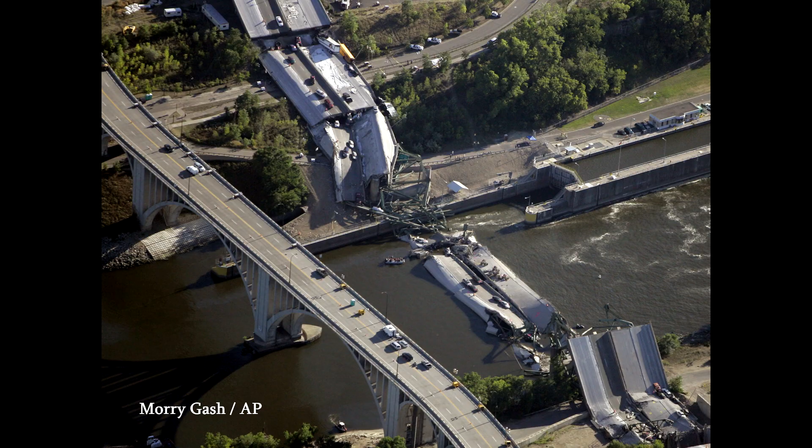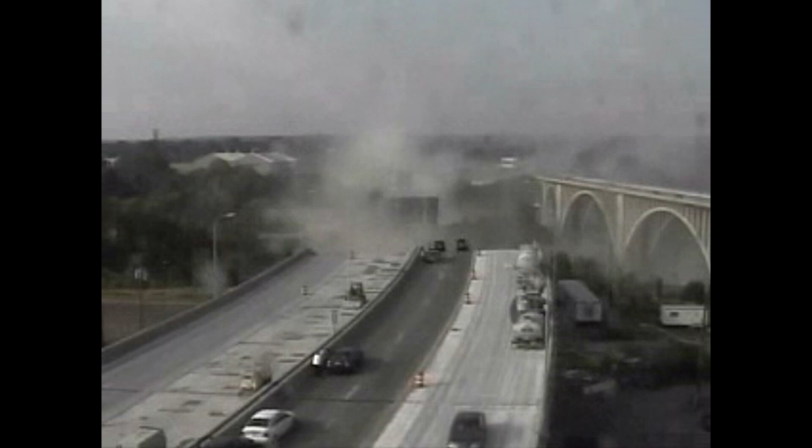As such, Minneapolis, Hennepin County, MnDOT, the state of Minnesota, and many neighboring communities boasted an excellent response to this sudden emergency, certainly saving lives in the process. But regardless of how quick and effective response was, one huge question remains. How on earth did the bridge collapse?

First, we have to start with what was going on when the failure took place. The collapse occurred at 6:05 p.m. during the evening rush hour, not to mention that this occurred in the downtown of the busiest city in Minnesota. About 140,000 vehicles crossed this bridge daily, and at this point in the day was when a significant portion of those crossed.

Additionally, roughly 578,000 pounds of construction equipment and material laid on the bridge for road work, adding stress to the bridge. However, these things added together shouldn't have been enough to bring the bridge down by themselves. That said, we're going to have to dig a bit deeper for the primary cause.

In previous years, the bridge had been cited for failure to meet various safety standards as well as for corroding rebar within the bridge in a separate citation. As a result, upgrades were made to the medians and railings, and about 2 inches of concrete was poured over the corroding rebar. These two things added over 4 million pounds of dead load to the bridge, a 19.5% increase.

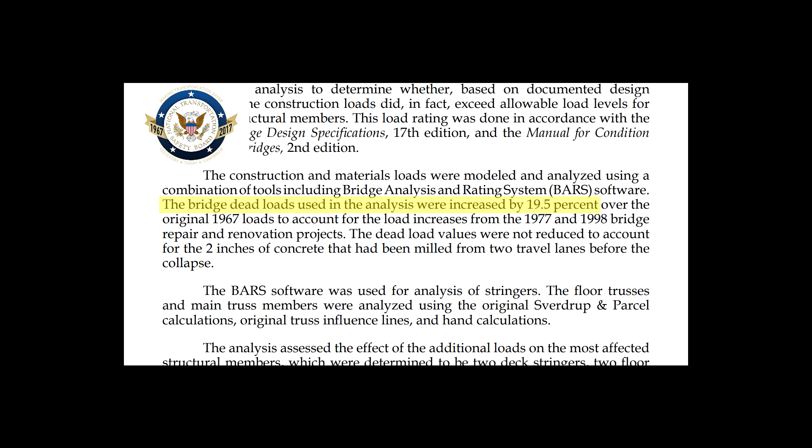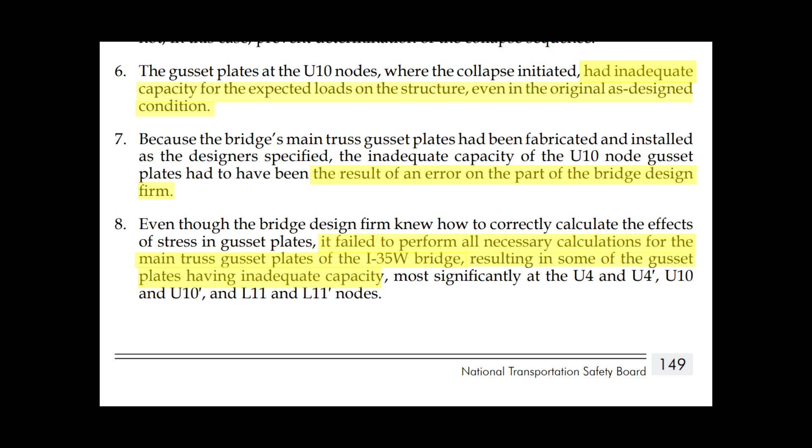However, most significant and probably most terrifying of all was the bridge's gusset plates. These hold the massive steel beams together at their joints and are a primary factor in a bridge's security. The plates on this bridge were excessively thin and provided only half of the resistance required for the bridge due to a design flaw. Additionally, many of those gusset plates were noted in annual inspections to have been bowing. You know, not something you want happening to the pieces holding a bridge together.

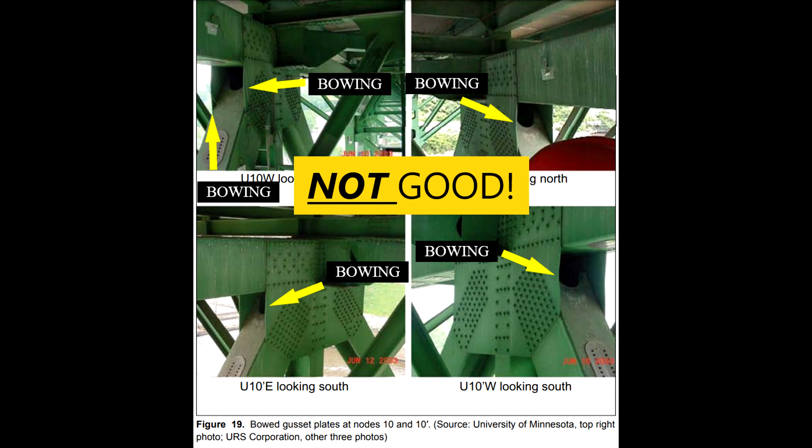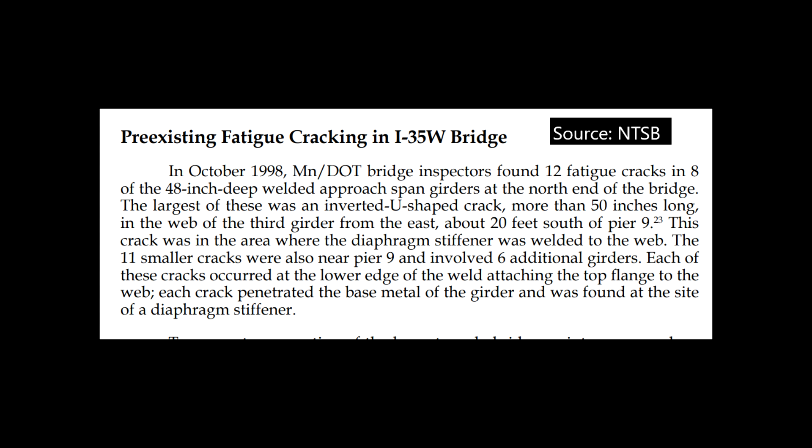Making matters worse, the bridge was noted for not having much structural redundancy in the main trusses of the bridge, meaning a failure in one key place was likely to result in the failure of the entire bridge. The National Transportation Safety Board, or NTSB, concluded in its report on the incident that this was the primary factor in the collapse. A recipe for disaster brewing ever since the blueprints were being drawn.

Behind me stands the St. Anthony Falls Bridge in Minneapolis, the replacement for the I-35W Mississippi River Bridge. This new bridge was designed to last until about 2108. I say new, but in reality this bridge is already about 16 years old.

Unlike the last bridge, this one was constructed with the future in mind. Wide shoulders, extra lanes, and even designated areas for buses and light rail in case they're ever implemented in the future. That way, modifications don't have to be made to the bridge if light rail is ever added, which could possibly bring the structural integrity into question.

High-performance concrete was used in the construction of the bridge, as well as other structural enhancements and redundancies should any part of the bridge fail. That way, the bridge is as safe as it can possibly be, and in case one part of the bridge fails, there are still other redundancies to fall back on and fail-safes to make sure that the bridge is still safe until repairs can be made.

The bridge also has a high-tech system of over 300 sensors to monitor any fluctuations in its structure. The bridge also features decorative LED nighttime lighting and a special set of concrete pillars meant to resemble the symbols for water on a map. Quite intriguingly, the pillars are made of a material called TX Active concrete, which reacts with ultraviolet rays to suck chemicals out of the air that are typically emitted from passing vehicles.

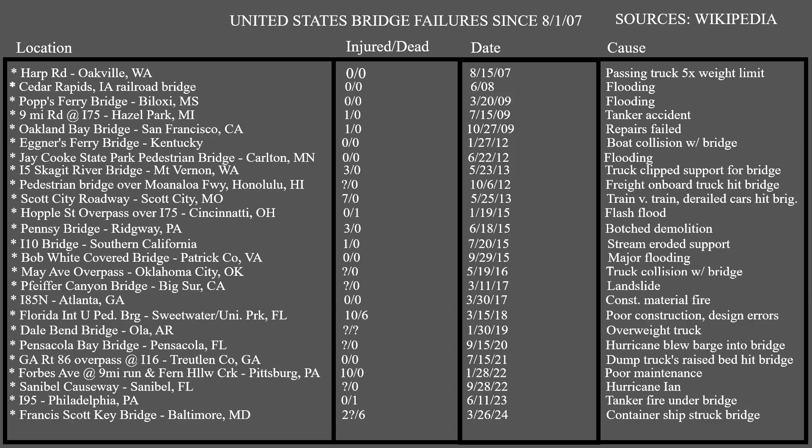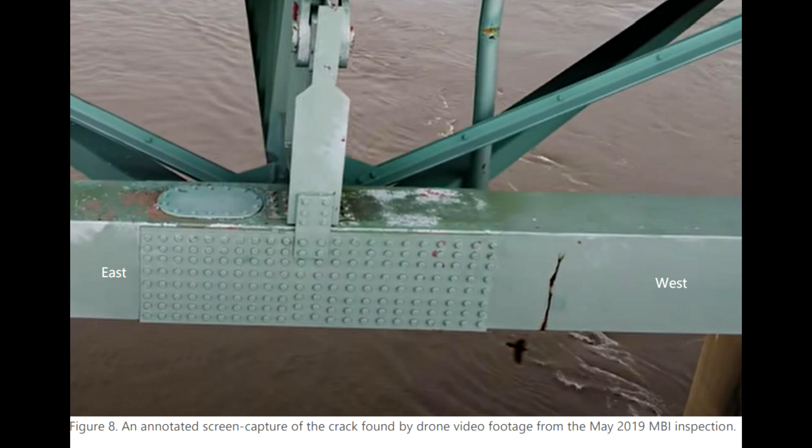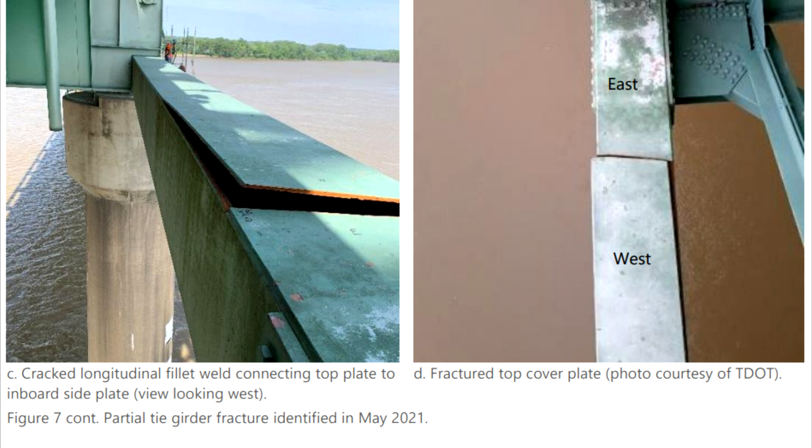alone. A freakishly close call made national headlines back in 2021 when a massive crack was discovered on the Hernando de Soto Bridge connecting Memphis, Tennessee and West Memphis, Arkansas, also across the Mississippi River. Not to be confused with the similarly named DeSoto Bridge back in St. Cloud, Minnesota. Scarily, the crack had apparently been either overlooked or brushed off for a number of years and was even visible in a photo taken on a kayak in 2016, about five years earlier.

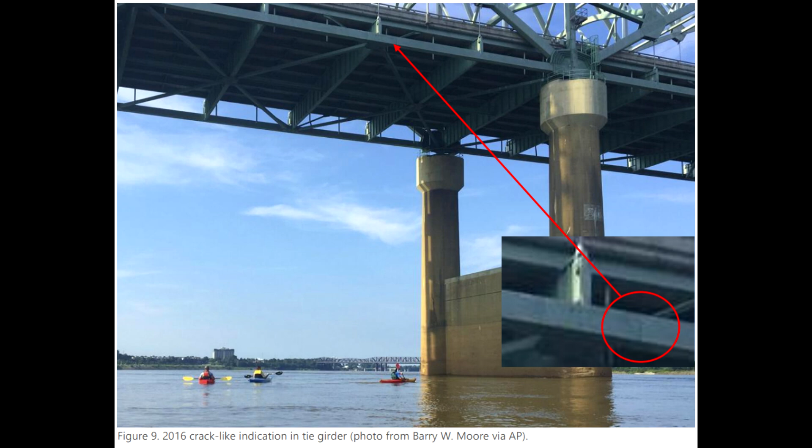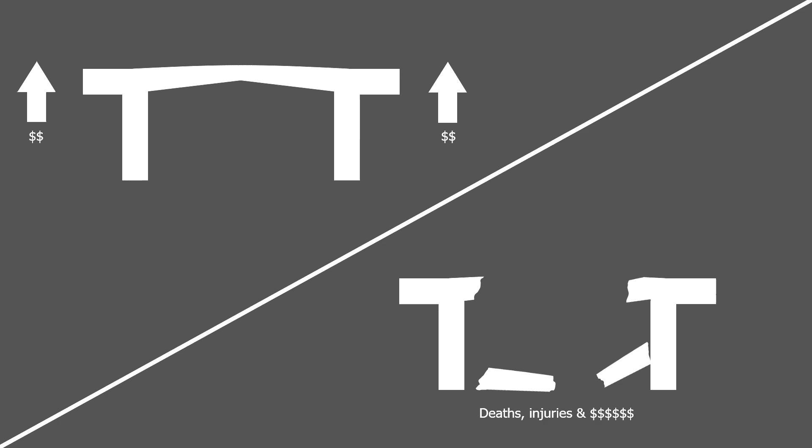If action isn't taken, these issues will only continue to cause major failures, inevitably leading to more deaths. Bridge maintenance can be expensive, but the alternative to regular intense maintenance is letting a bridge crumble until it collapses. In November of 2021, the bipartisan infrastructure deal was passed by Congress. Among multiple things to receive federal funding from this deal were U.S. roads and bridges. $110 billion were allocated to this fund to help repair and rebuild crumbling bridges across the country.

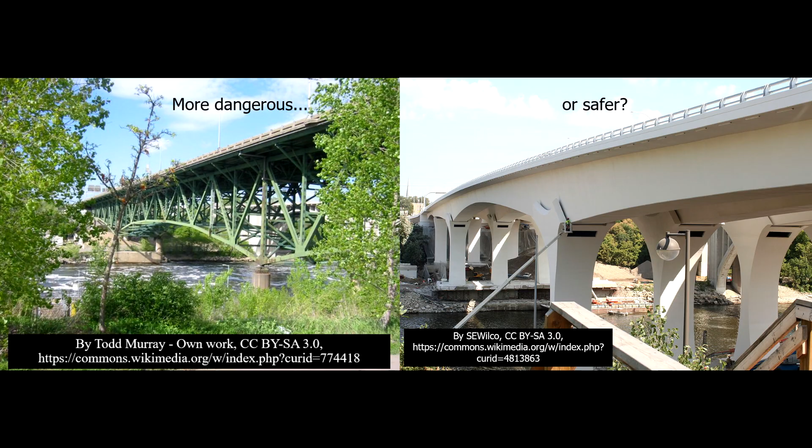This deal will help to lower the average age of bridges and the number of structurally deficient ones across the country. Only time will tell whether more federal funding will come for U.S. infrastructure and whether U.S. bridges will be safer or more dangerous to cross. With the 2024 U.S. election coming up fast, it's critical for civilians to research their candidates' views on issues like this and make an educated vote so that we can all come together as a team and help keep our nation's bridges and roads safe for many years to come.